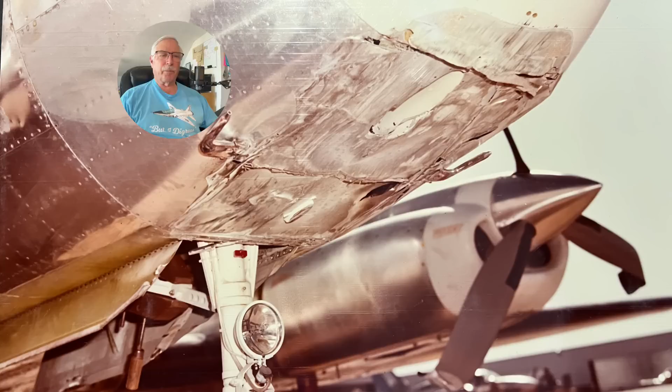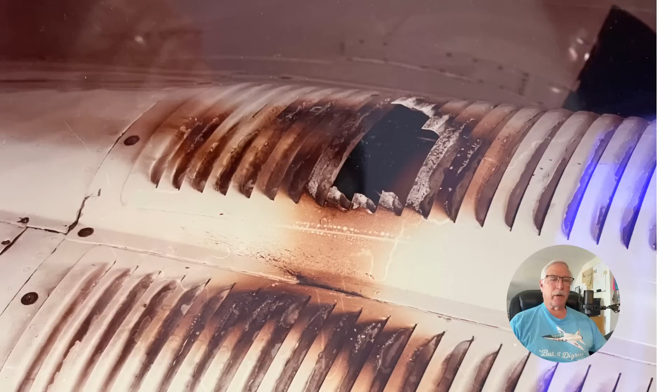Of course, I get hired by the airlines. I get furloughed. I'm working for Cessna Flight Test, and we had a little problem with the hydraulic system, a poor flare, and I talk about this in another video. But ended up sliding a 404 on its nose to a stop at Wichita, and that's fine, no problem with that. My very last flight at Wichita before I went to a flight test at Boeing involved a fire on the 421 that burnt through the engine cowling. Well, fine. Didn't get a rise out of her.

But the guy who owned it sold it. A guy restored it, and unfortunately, on his first test flight, he didn't realize that he had wired the ailerons backwards. So he had reverse control, didn't do an adequate flight control check before he took off, and with the reverse controls, he ended up crashing and killing himself. Well, okay, that's fine. My wife always considered me a good pilot, so she didn't worry.

Later on, I said, hey, NASA invited me to come out and do a flight test on the F-18 with him. I'm going to fly with Gordon Fullerton, a two-time shuttle astronaut, and okay, that's fine, no problem with that. But when it came to the IPTN 250, she says to me, I'd really prefer that you don't fly that aircraft.

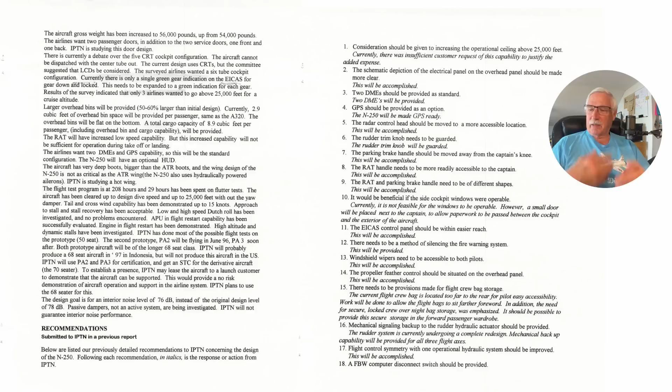Another thing, this has to do with the ATR issue, with the icing and the flow-back problem. One thing they did correctly was they had bigger boots. The boots went farther back than they did on the ATR, so it could cover more area of the leading edge. And the other thing, which got into the 60-pound snatching issue on the ATR, was that they used hydraulically powered ailerons, so you're not going to have that issue. They were also studying the use of a hot wing.

So far, the flight test program had 208 hours, and 29 of it had been spent on flutter testing, so they had cleared that part of the envelope. They expected to have a second aircraft flying by June of '96, and they did build that aircraft. They ended up only building 2 of these. The program was canceled. They built 2, and they were going to build a third, but that aircraft was never built.

Another little issue here was the interior noise level was high. With turboprops you can get pretty good noise control, but they were having a noise level problem. The design was 76 dB, and the original design level was 78. Now 2 dB isn't a doubling of the power, but that difference is a lot more significant than it may sound like.

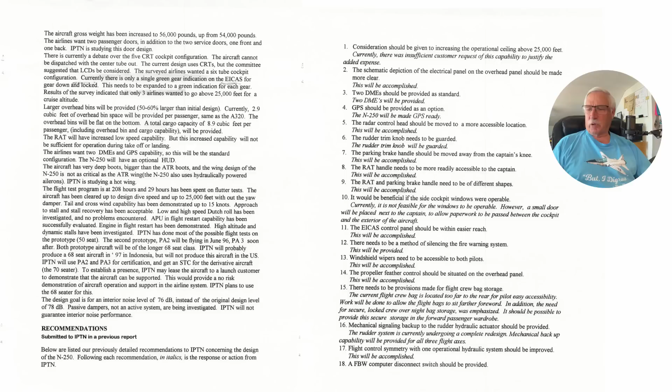Now some more items we addressed. The schematic display of the electrical panel on the overhead panel, where you had control of it, was really not easy to follow, and it was almost kind of deceptive. So we said, you guys need to clean that up, and they agreed to do that, and we gave them some ideas on that.

They only had 1 DME provider. We said you really need 2. This was the year before GPS was really coming into its own, and we said GPS should at least be provided as an option. They said, hey, we'll do 2 DMEs and we'll provide GPS as an option, we'll make it GPS ready. The radar control head is way back here, very difficult to operate, even for the captain, and especially for the first officer.

Interesting thing was they had a rudder trim knob, and you could place a flight manual, a book, anything on that, and actually activate the rudder trim. So I said, no, that's really bad. You need to provide a method of guarding that so you don't have that happen.

The parking brake handle was next to the captain's knee, very hard to operate. And you'll love this one, they needed a method of silencing the fire warning system. If the fire warning system goes on in their present design, there's no way to silence it, it's just going to keep going. I guess if the fire goes out, but there are a lot of times you get extended fire warning because it takes a while for the system to cool down, and that can be several minutes. You don't want that bell going off the entire time.

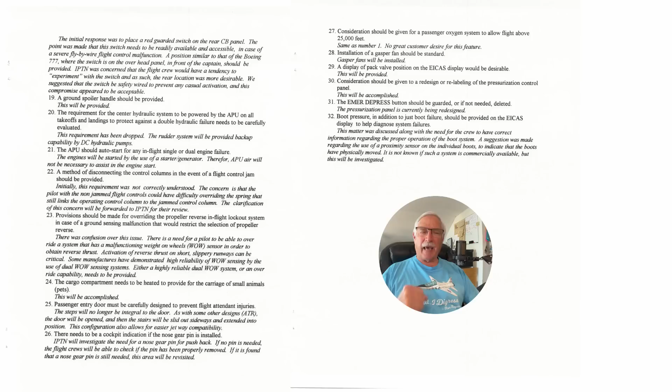You safety wire it, so if the safety wire is broken, you can come talk to whoever did that. There was no way to activate the ground spoilers other than automatically, and we said you need a mechanical handle so that once they're on the ground, if the pilots want the ground spoilers, they can get them in case there's a malfunction, because that's not an unheard of problem.

And the rudder system will also have backup DC pumps in addition to the manual backup.

We also said that the APU should auto-start in flight for any single or dual engine failure. They were a little hesitant on that since they had the batteries, but it's not uncommon for the system to be designed so that if you have a dual engine failure, you get the APU online as a backup system.

Also, the cargo compartment needs to be heated in case anybody is carrying small animals.

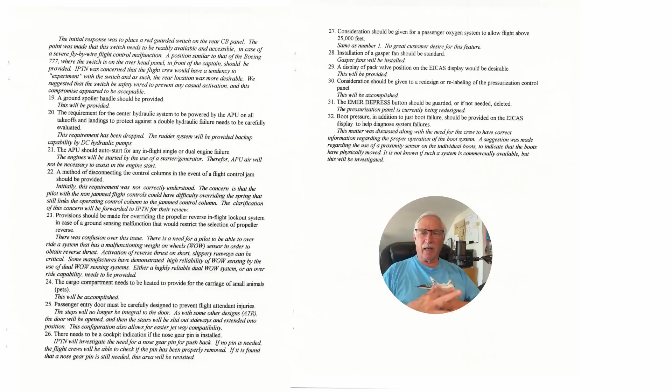And there was an issue on the cabin door, the way the steps were kind of integrated, that we thought it would be very easy for a flight attendant to injure themselves the way certain aspects of that step stuck out in the door.

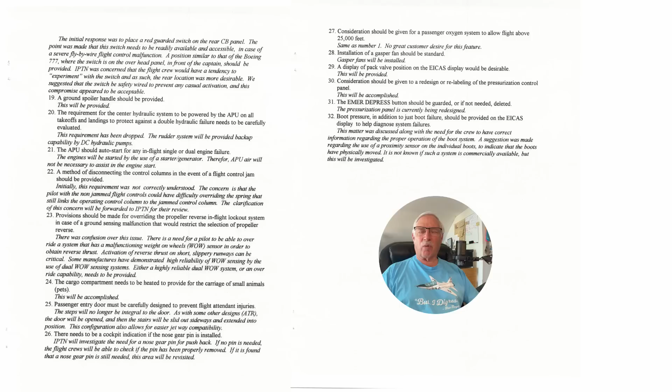Another fun thing, and I'll show you this on the overhead panel, is the emergency depressurization button needs to be guarded. You could be reaching your hand up there to activate something and inadvertently press that, and if you're cruising along at 25,000 feet and you hit the wrong button and depressurize the cabin, that is not going to be a good thing.

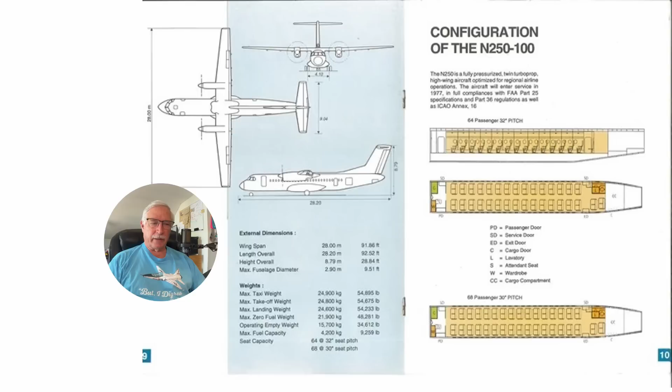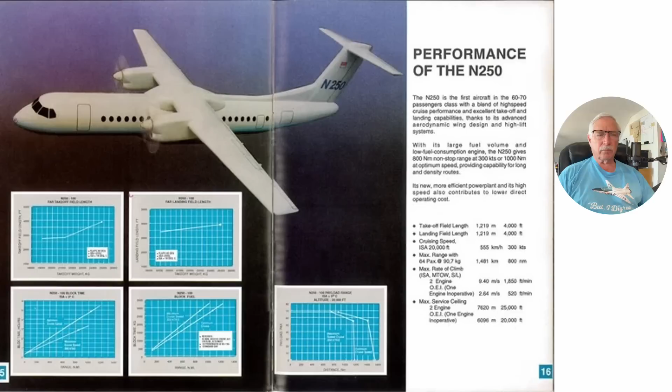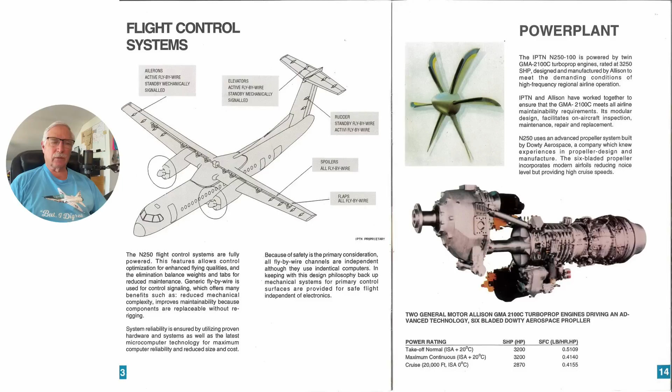Getting into the flight control systems, which I'll talk about in just a second, they needed a lot more work. There's the power plant with the six-bladed prop, and there's another picture of it. As propellers go, very beautiful.

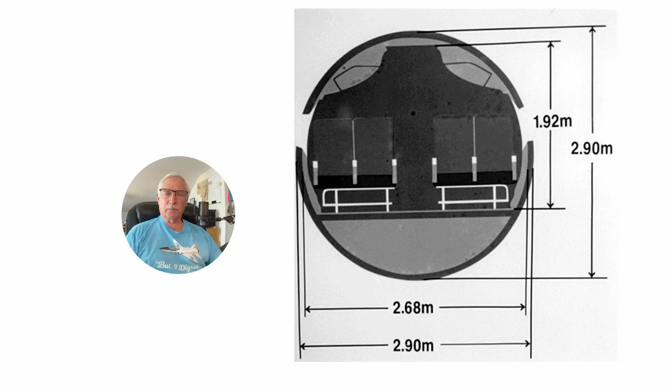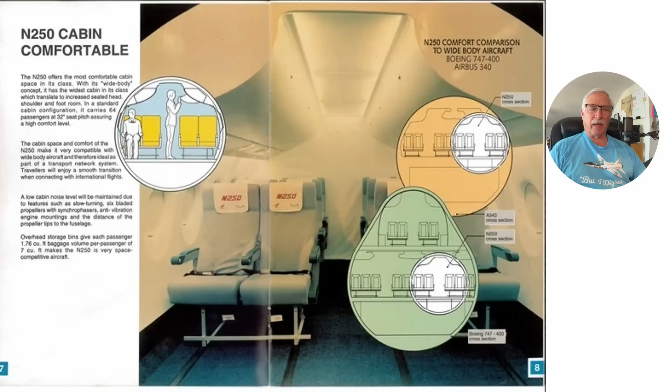The basic interior cabin design, and there's some more pictures. They're comparing it to larger aircraft that have small seating arrangements, if you will.

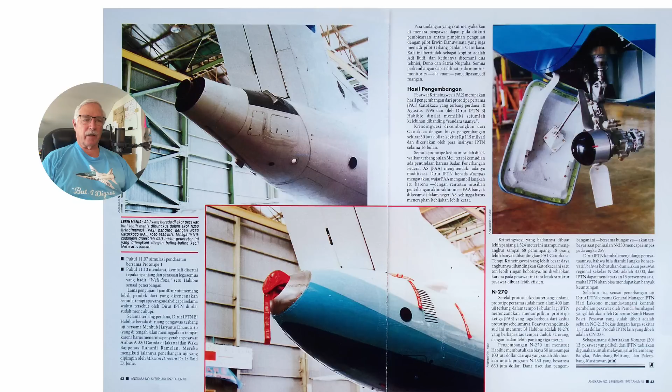And there's a picture of the APU in the tail end, and there's the ram air turbine that's been deployed. And again, the basic outlay.

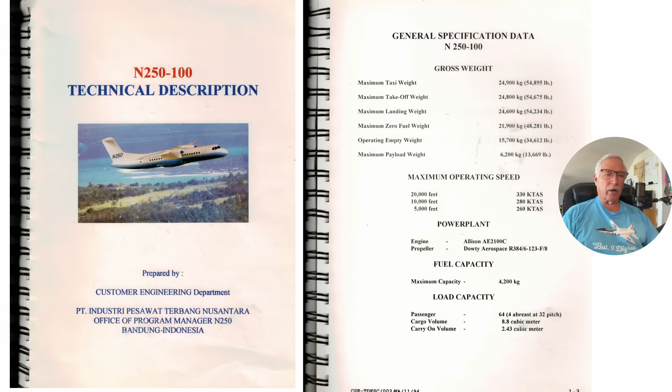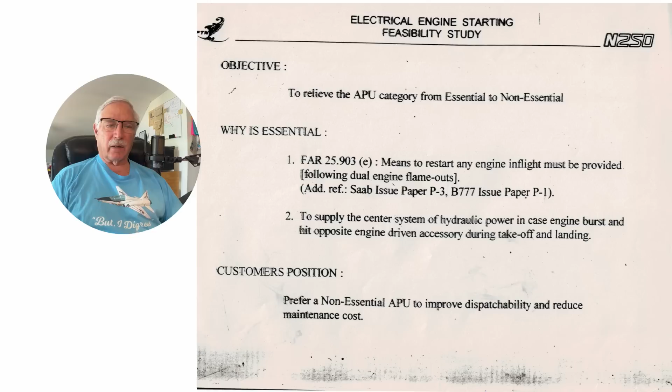So we get into the technical description here with the various parameters for the aircraft, if you're interested. I talked about the ability to start the engines if you have an in-flight engine failure and a dual engine flameout. You need a way to restart those, and also they needed a way to supply the center hydraulic system in case you had an engine problem. That had not been developed at the time.

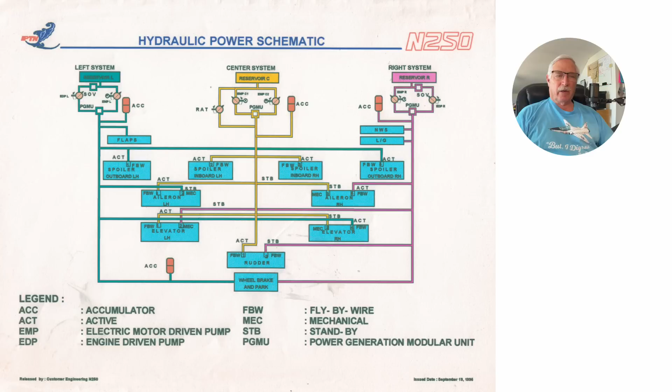Now this is the new and improved system, but for most of you familiar with this type of design, you'll notice there still isn't a horrendous amount of backup here. Two hydraulic systems go to the rudder, which would be extremely flight critical if you have an engine failure, because big propellers like that need a lot of rudder to control. They really should have three systems.

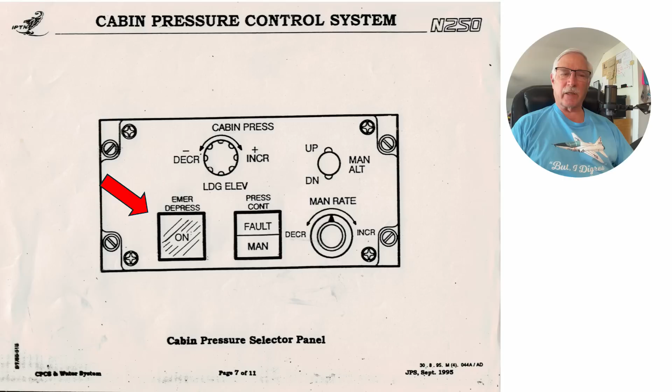Oh, and here's a fun little aspect. The emergency depressurization switch here was not guarded, so if you were moving your fingers around there, you could possibly inadvertently press that switch. And of course, if you're cruising up near 25,000 feet, that's not going to be a good thing.

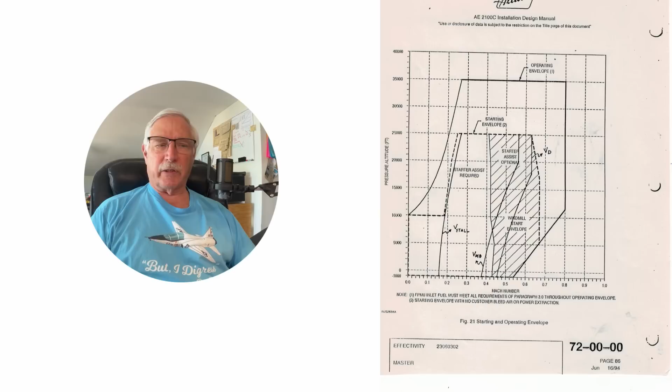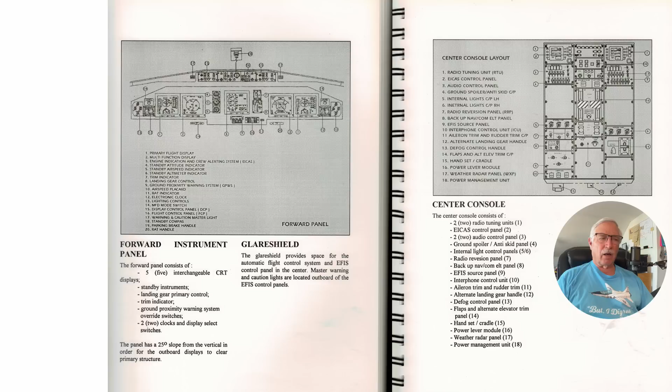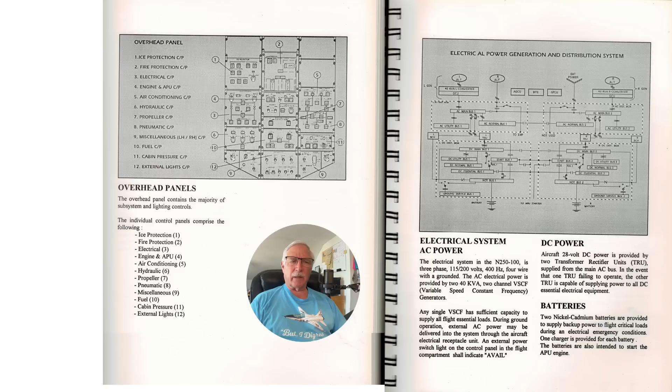The layout generally wasn't too bad. We had a lot of recommendations - things were just not convenient, and they could do a lot better positioning of various components on the forward and center console. The overhead and power distribution system wasn't too bad, but the display on the overhead panel is just not very intuitive.

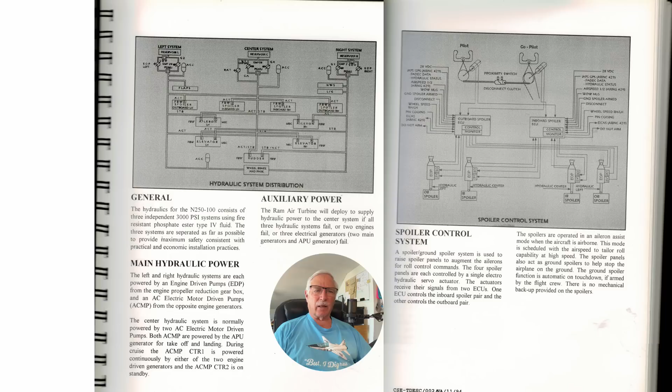And here, of course, I gave you a better picture of the hydraulic system there, and also the various systems here with the spoiler controls. At the time, they did not have any manual backup for this - it was all hydraulic. We said you really should have something more than just fully hydraulic back control of these systems, without any way of manually backing it up in case you had a fly-by-wire system problem or a hydraulic problem.

Indonesia is definitely a third world country - there's no other way to say it than that. When you're out, you see a guy riding with a bunch of dead chickens hung over the handlebars, taking him to a restaurant.